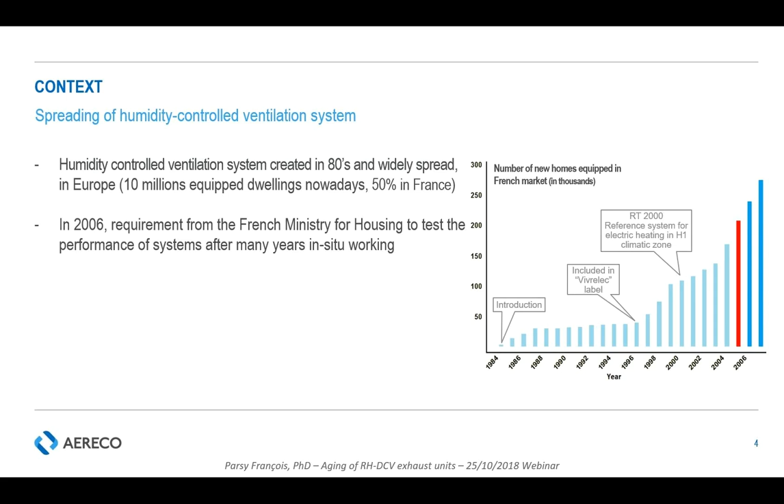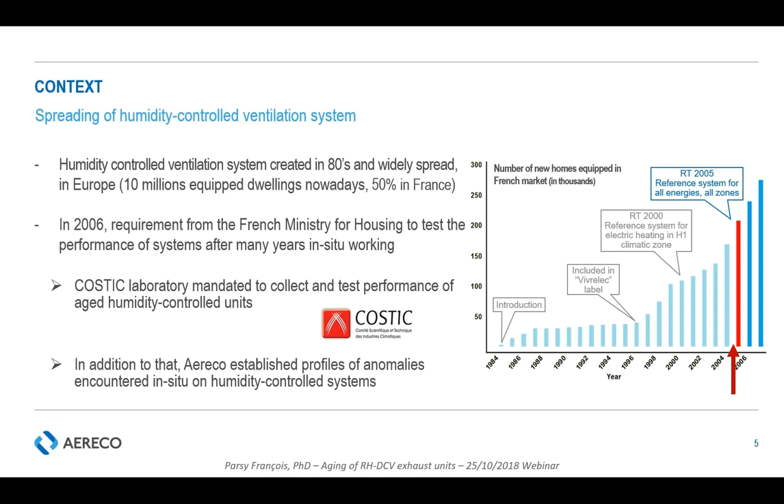Before generalizing the system as a reference in thermal regulation in 2006, the French Ministry for Housing wanted to test the performances of units after prolonged in-situ functioning. So it mandated the COSTIC laboratory to collect and test units that had been installed in occupied dwellings for long periods of time. Aereco took part in this study. I will present the results here, along with additional statistics on the installation.

Let me present the system first. This is a schematic of a multifamily building. Here on the roof, a constant pressure fan puts the dwelling under pressure. So the air enters the housing via air inlets in the dry room, that's number 1. It circulates in the house via the undercuts and exits the dwelling via the service rooms via exhaust units located in number 2. Today, we will focus on these exhaust units only.

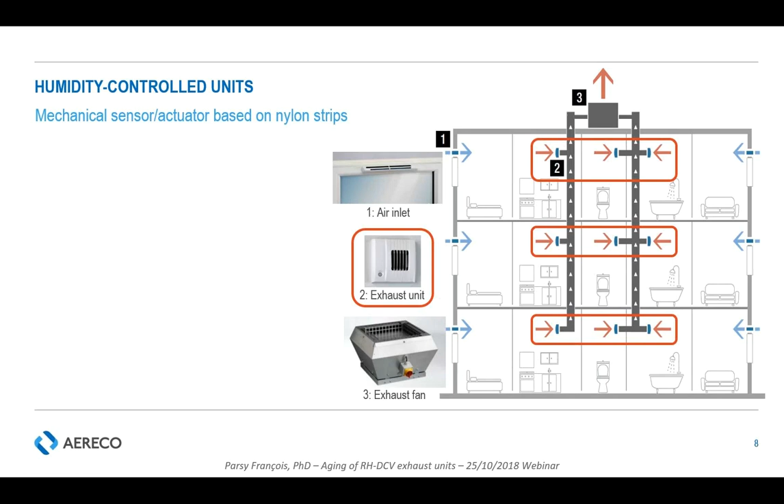You can see here on the left an exploded view of a typical product. Part 6 on the drawing is a hygroscopic sensor and actuator. It is made of several nylon strips that extend and retract when absorbing and desorbing humidity from the environment. Doing this, it opens and closes a shutter, controlling the airflow crossing the unit.

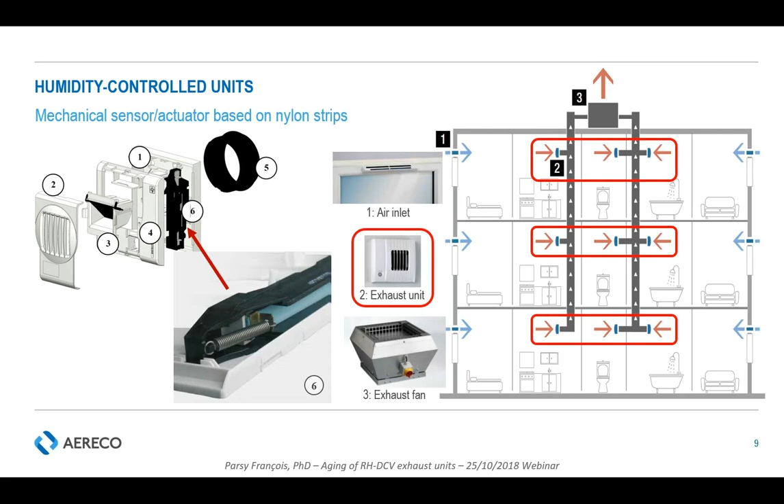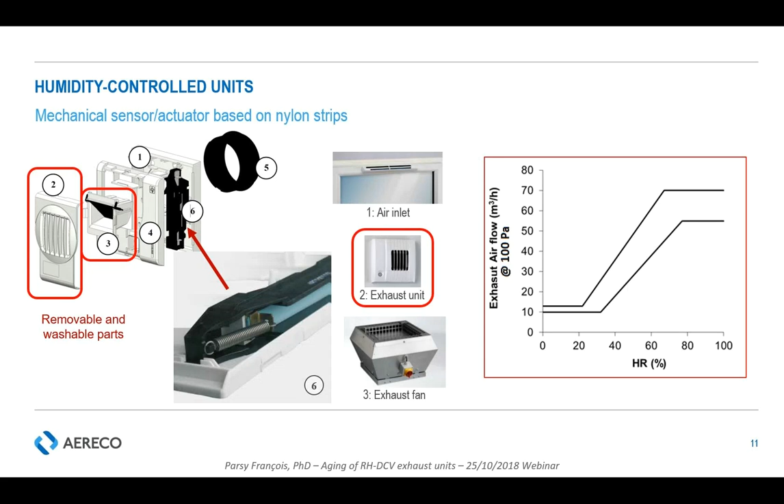I would just like to add, because it's important for the next few slides, that part 2 and 3 on the left drawing are removable and washable. That is all the maintenance there is to do with these devices.

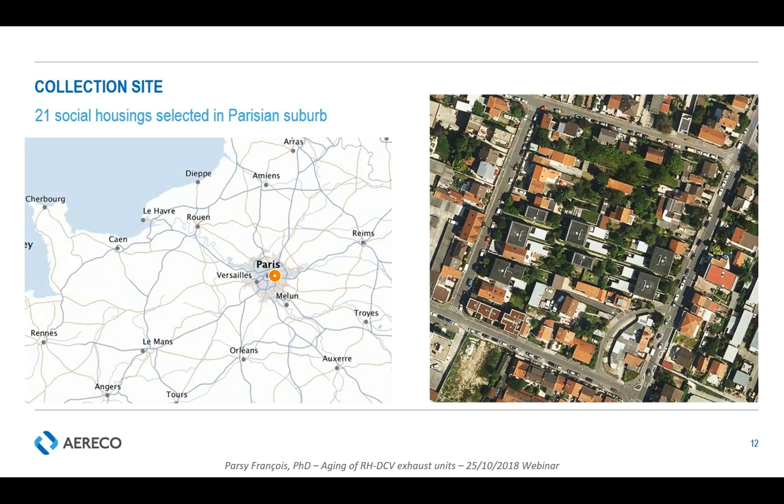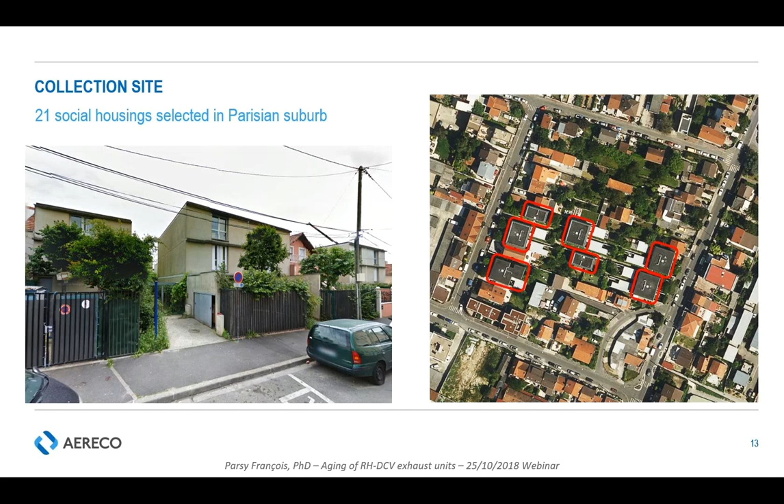For this study, 21 social housings in the Parisian suburb were selected by the COSTIC laboratory. The installation was 6 years old. Neither Aereco nor the COSTIC was involved in its realization back then. All the exhaust units were photographed before being collected, and this collection stage was a good occasion for simple statistics on the installation and the maintenance level of the units. That's the first set of results I will present now.

Let's start with the installation. What we found out is that 12% of the exhaust units were installed in the wrong room, meaning, for instance, a kitchen unit was installed in a bathroom. 6% were not in accordance with the dwelling size. By that I mean that units designed for a 5-bedroom apartment were installed in a 3-bedroom apartment, for instance. As a whole, 55% of the dwellings presented one of these nonconformities.

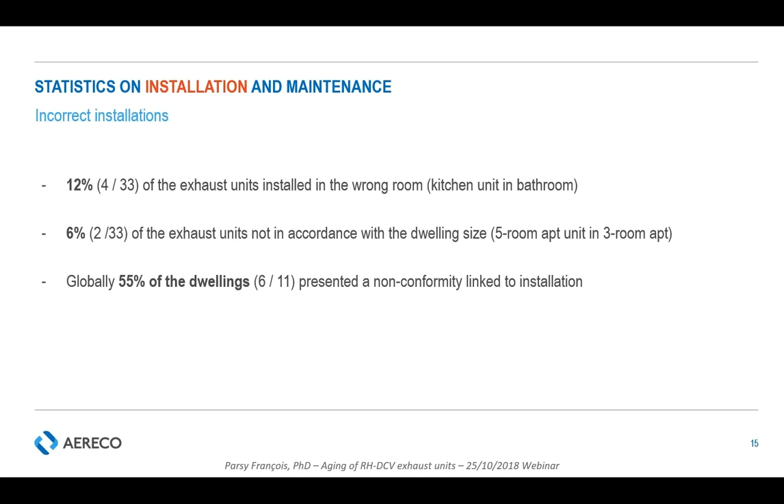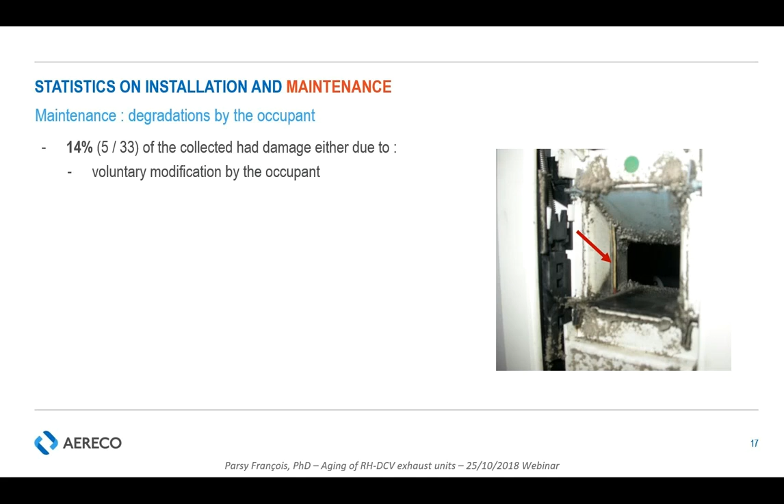So this was installation. Let's speak about the occupant's maintenance. In addition to this installation problem, we have seen degradations by the occupants on 5 out of 33 collected units. These degradations are sometimes voluntary, like in this case. You can see that the occupant blocks the shutter with a match. Of course, there is no modulation in this case.

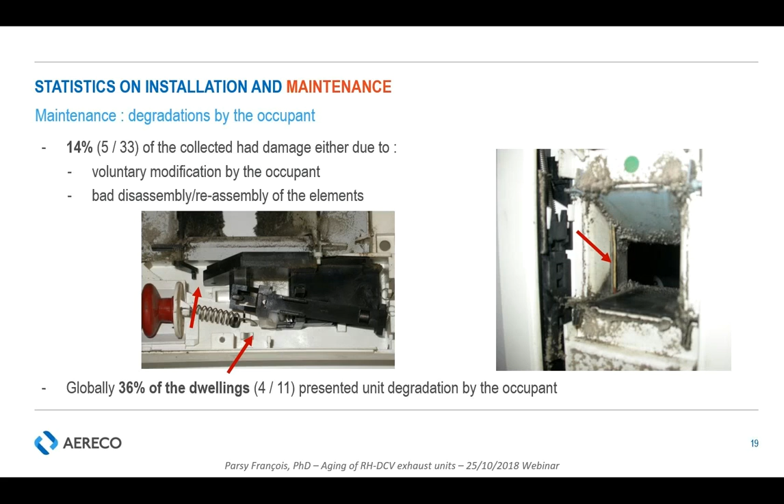And sometimes the degradation is not voluntary. In this case, the occupant disassembled the product, probably for maintenance, and did not reassemble it correctly. In total, 4 out of the 11 dwellings presented degradations of the unit by the occupants.

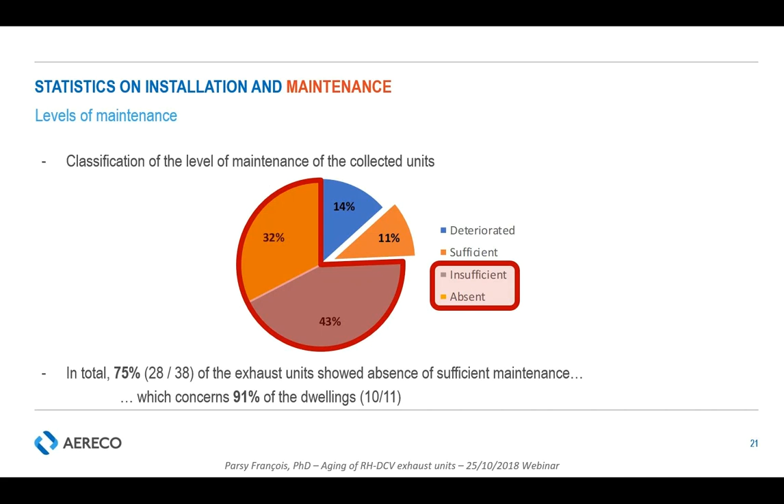So in total, 75% of the collected units presented a lack of maintenance. In terms of number of dwellings, that's about 90%, so the vast majority.

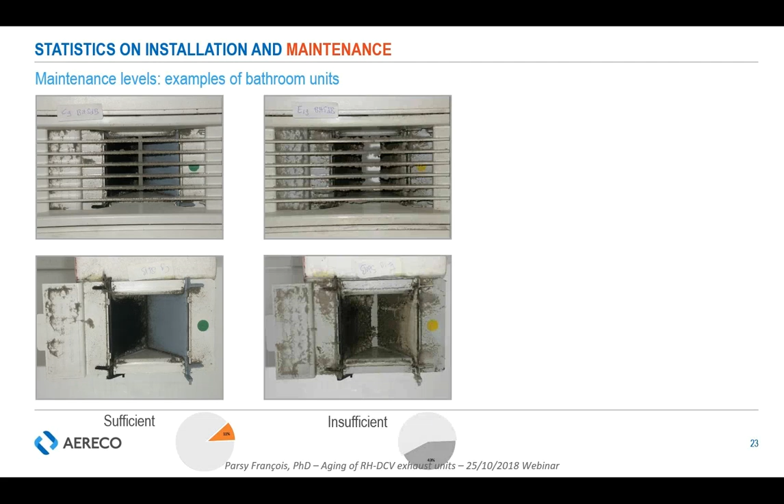These examples were taken from bathrooms, so the dust you can see is rather dry and fibrous. In kitchens, the dirt is usually more greasy.

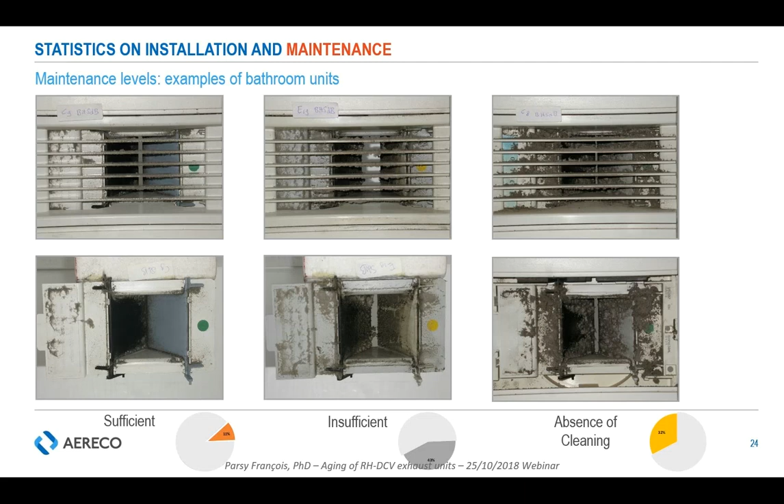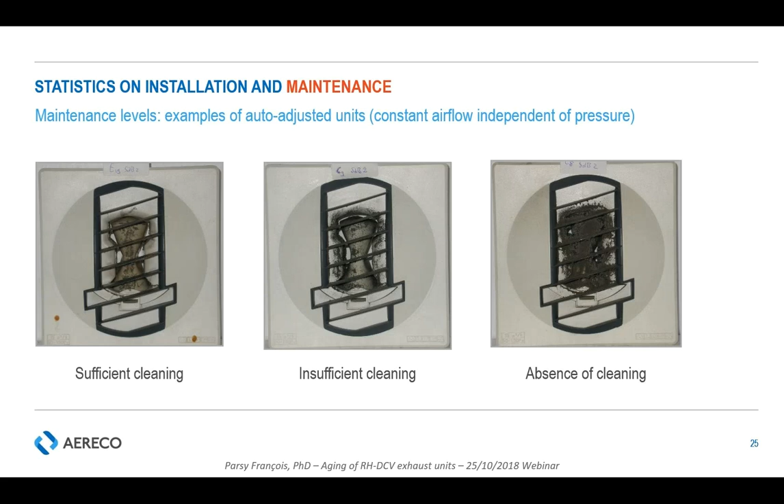Once the units were collected, we characterized them twice in our laboratory. A first time as collected, meaning without any cleaning or maintenance by us, and a second time after a proper maintenance. The next few slides are all about examples of these 2 characterizations and their comparison.

The examples I will present now are representative of the unit before classified as not maintained. We choose this category because it is the most critical one.

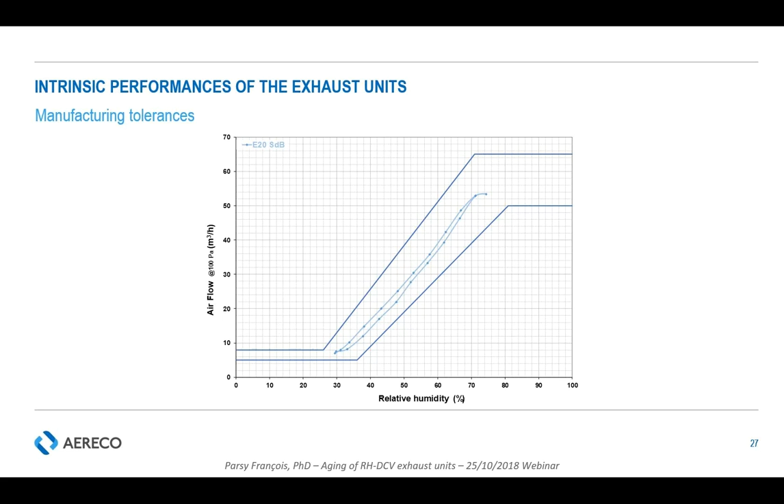This is what the product looked like when we first characterized it before the cleaning. This is a kitchen unit, and as you can see, there is a big difference with the bathroom unit I showed earlier. As I said, the dirt is more greasy.

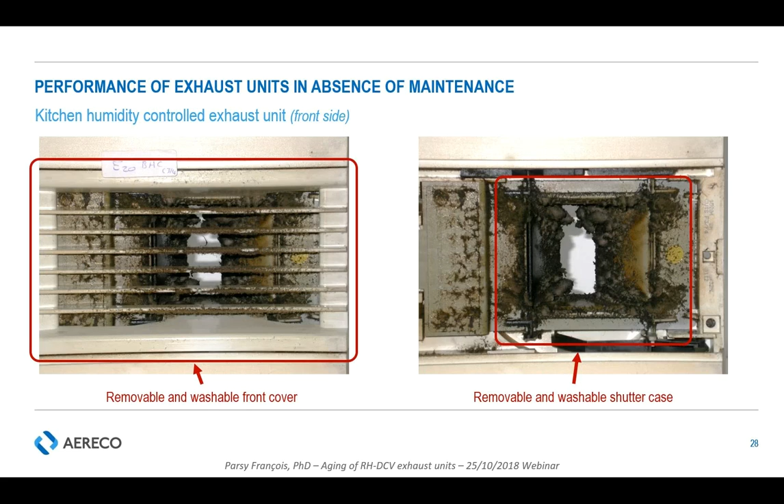And this is the back side here on the left, and on the right you can see the nylon strips. You can see that there is a little dust deposited on the sensor.

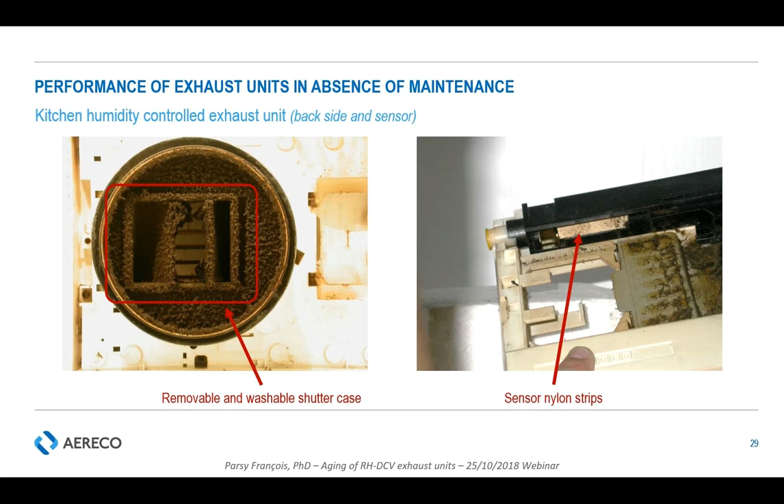Here the characteristic as plotted on our test bench. There is a clear reduction of the maximum airflow, in this case by 27%, from around 65 cubic meters per hour to 47 cubic meters per hour. We attribute this reduction to the obstruction of the canal by the dirt.

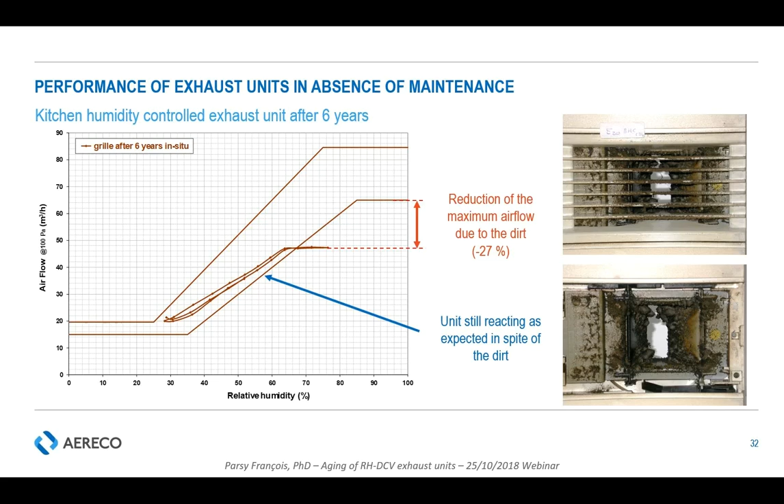But still, you see that the unit is reacting to humidity. When the air is really dry, the airflow is well adapted to the requirement, and when there is an episode of high humidity, like someone cooking for instance, the airflow will increase. Well, not as much as it should, but it will stay up here until the humidity is evacuated, which will take longer. When the episode is over, the airflow comes back to its initial state within the tolerances.

And here it gets a little more complicated, I'm sorry about it. So some of the exhaust units were in such a bad condition that we considered them beyond maintenance. So what we did is we changed the removable parts as I shown earlier, meaning the shutter and the grill that you can see here on the right.

These parts do not influence the hygroscopic behavior, but only the minimum and the maximum airflows. The nylon strip, which defines the range of reaction to humidity, was left unchanged. The problem was the installation took place 6 years before, so the regulation changed between the installation and the collection stage. The airflow of the new products had to be adapted in consequence, of course. So we had to use new versions of the shutter case, and this explains the modification of the tolerance template that you can see here.

After this change, which is equivalent to a proper and regular maintenance, the blue characteristic was plotted. You can see that the maximum airflow is well recovered, and we can see that the curve is slightly offset toward higher openings. This is something we observed in some cases.

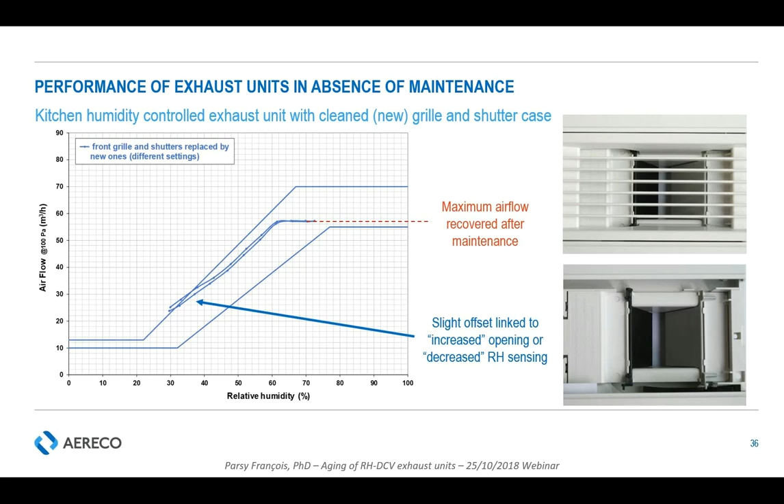So most of the time the curve is inside the template, sometimes it's a little higher. I will come back to statistics later. And this shows that the aging of the component tends toward higher volume flows, which moves the trade-off between IAQ and thermal performances toward IAQ. From a health perspective, this is a better way to drift.

Here is a second example. This is a kitchen unit that was installed in a bathroom. Same as earlier, the maximum airflow is reduced, this time by 32%, and this time the minimum airflow is also a bit reduced. But we still observe the correct reaction to humidity between 30 and 70%, so the active part, the nylon strip, is most certainly intact.

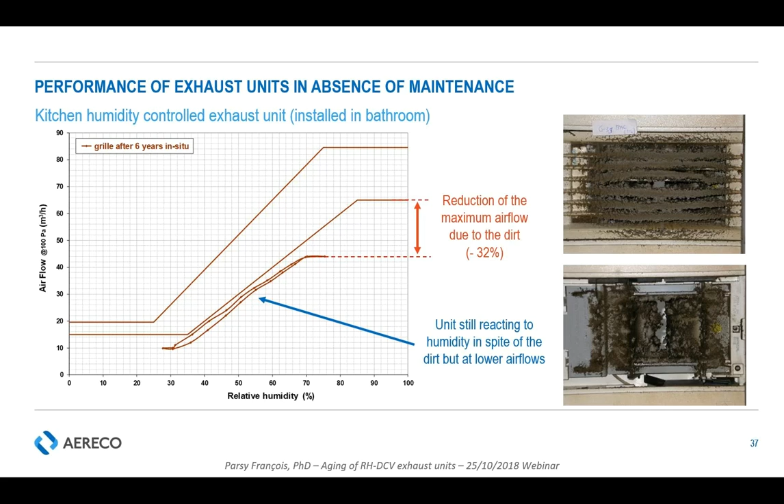When we change the passive parts, the grill and the shutter case, the performances are fully recovered. This time we are perfectly inside the tolerances.

Superimposing curves like this is pretty interesting because you can see that the impact of the dirt on the device is almost completely vertical. Only the extreme volume flows are changed, so while the humidity range stays very close to what it is supposed to be.

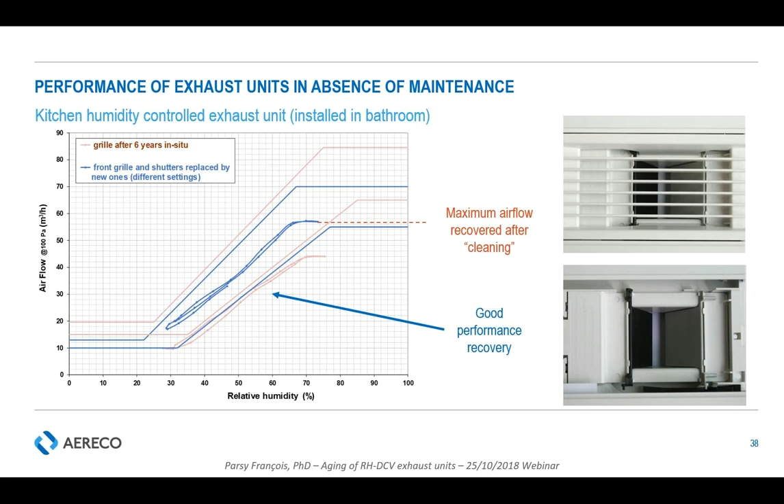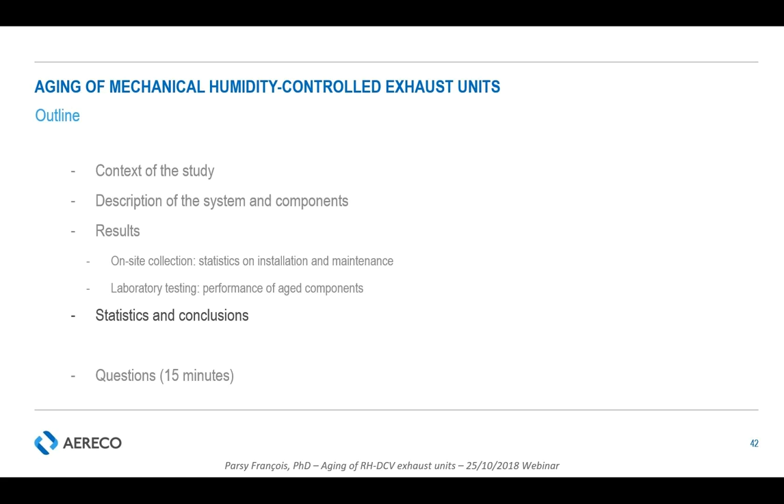I just presented a few examples of characterizations. So here comes the statistics we extracted over all the collected units, along with our conclusions.

First, before cleaning, all the collected humidity-controlled exhaust units showed conform hygroscopic behavior when the occupants haven't damaged them. Almost half the collected units still fit in the factory specifications, while the other half showed a reduction of the maximum airflow up to 34% due to clogging of the canal.

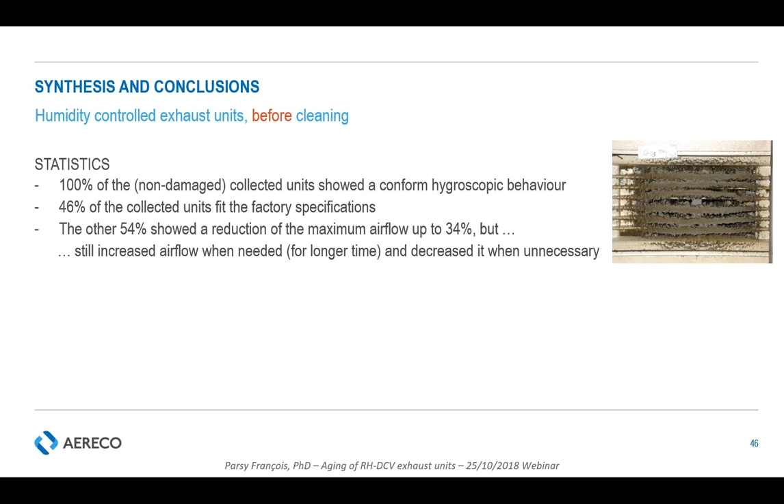But they still reacted to humidity, so as I said earlier, the episodes of pollution take longer to evacuate, but it gets done, and will still have reduced airflow when high airflows are not necessary. The accumulation of dirt almost only affects volume flow. The shift in hygroscopic behavior was all below 2% relative humidity in kitchens and below 5% in bathrooms.

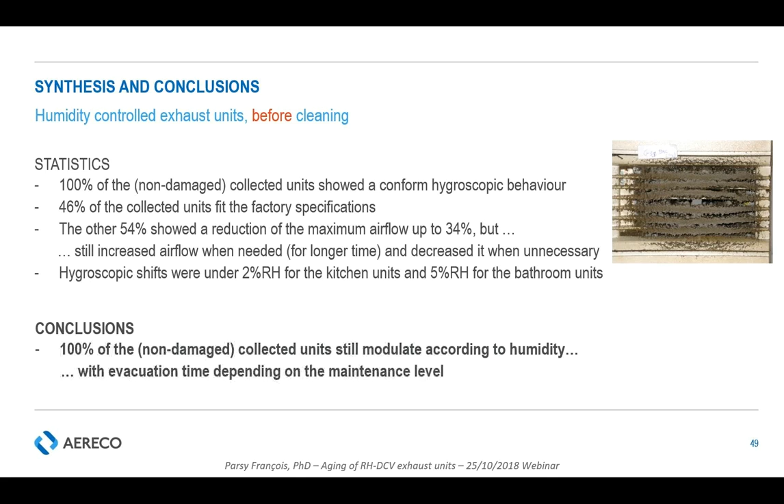In conclusion, after 6 years of in-situ functioning, even without maintenance, humidity-controlled exhaust units still modulate on humidity, but the evacuation time for pollutants will depend on the level of maintenance.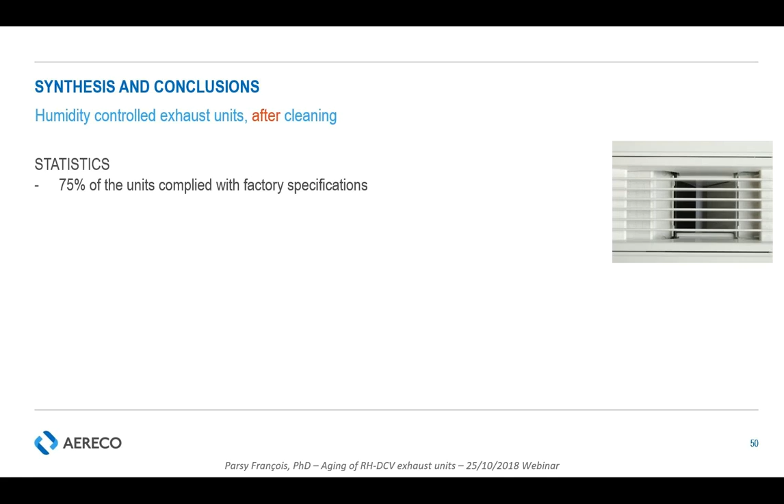And if the units are properly maintained, this study shows that 75% of the units complied with factory specifications after 6 years of functioning, while the other 25% showed a slight increase of the airflow, lower than 3 cubic meters per hour in the kitchens and lower than 2 cubic meters per hour in bathrooms.

In this regard, if the units are properly maintained, they will still ensure the design IAQ. And of course, the main conclusion to this study is that maintenance of ventilation units should be done properly and regularly.

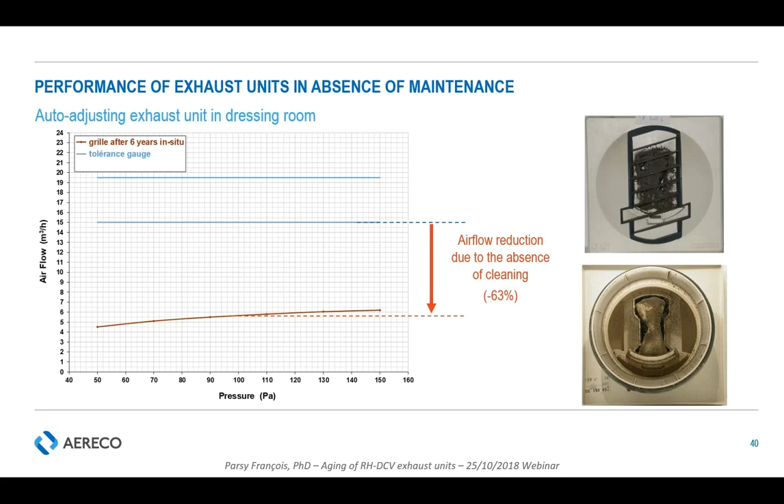On the other hand, with our exhaust units, what we proved with this presentation is that the units are still modulating on humidity. So even after a long time of in-situ functioning, the units fit within the factory specification, and some of them will only increase the airflow, so it will go toward better indoor air quality.

So one question was, what was the manual shutter positioning during the test? So there is no manual shutter position, and it's only automatic.

Gaëlle Guyot asked, to your knowledge, is this the first study about ventilation units aging? Well, it's not the only one, but to my knowledge it was the first. There is another monitoring taking place now, but it's a bit different - it's a follow-up on the performance project, and this monitoring will be more about the full system. Here we focused on the components, in the next one we will focus on the whole system, so we will focus more on IAQ and thermal losses. Here we just checked if the units were still inside the specifications.

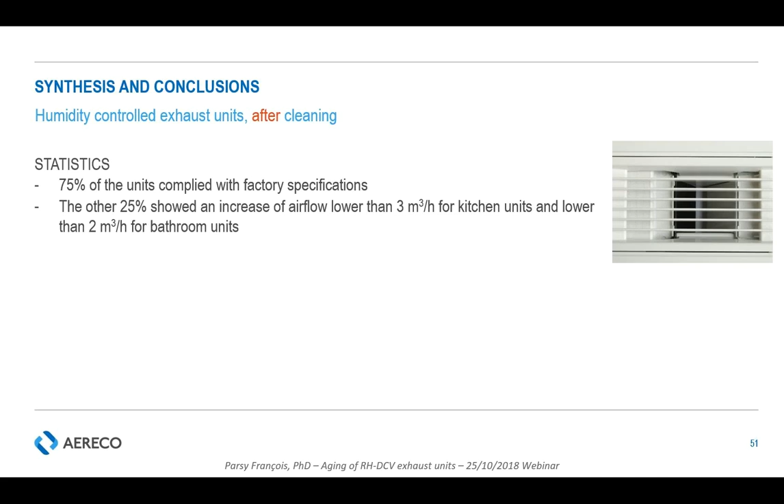The thing is, the regulation had changed between the installation and the collection, because it was 6 years before. So as a manufacturer we had to adapt our products to this new regulation. The minimum and maximum airflow had changed between the old version and the newer version. We didn't have any of the old ones in stock, so we had to install the new ones. Basically, this is very similar to a maintenance, changing the shutter case like this.

One question is how regularly the units should be cleaned. Well, it depends - basically it's when you see that it's getting dirty, but usually about once a year is enough.